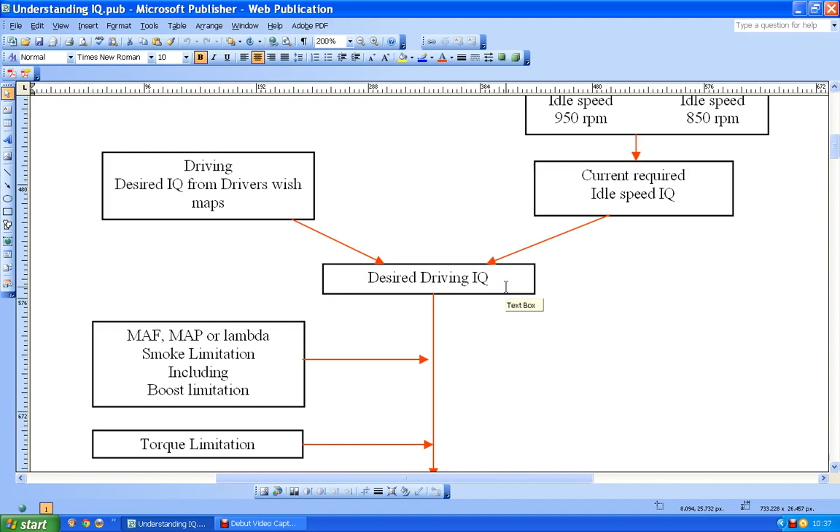Okay, this is the point at which I finished discussing in the last video, reaching the desired driving injection quantity, or IQ. And I won't go into how we got there because obviously I've just talked about that on the previous video. Having got that value, we can't just use that value, because if we did, we would have no way of knowing if there was the right amount of air to burn the fuel, and all sorts of other complicated bits and bobs to do with the ECU would just get totally confused.

So before this desired driving injection quantity can become a real desired driving injection quantity, if you've been looking at the maps, you obviously know it's got to go through a whole load of other maps to be tweaked and changed. There will be a MAF or a MAP or a lambda based smoke limitation of some description which will knock this driving desired IQ down to a smoke limited IQ. So in other words, limited by the amount of available air.

Now, people often don't take this into account when they're looking at this, but basically boost pressure and boost limitation are the same thing. They are really part of the smoke limitation, because if you get the boost mapping wrong, then the smoke limitation maps won't work properly anyway. So this really has to include the boost limitation and the boost maps as well. So you've got a whole chunk of information and maps all adjusting this desired driving IQ. So once we get to here, we've got our limited injection quantity.

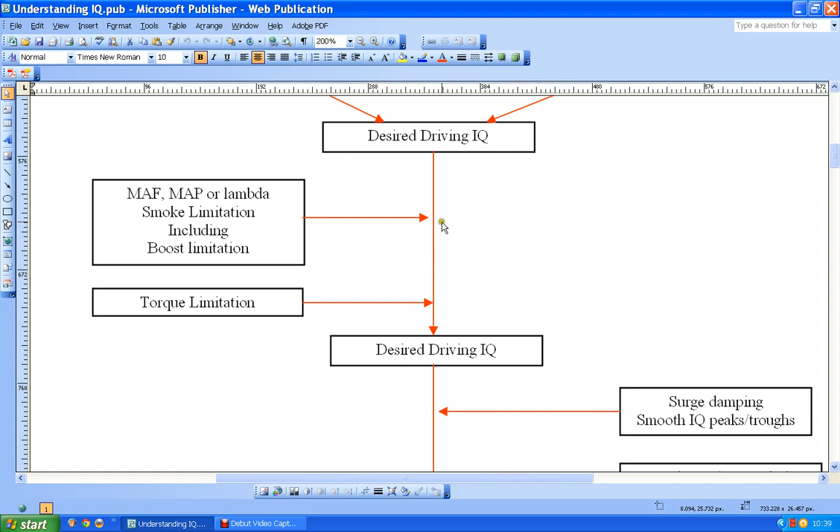Before we can get to our desired driving injection quantity, we've got to go through another limitation. The torque limiter will once again adjust whatever figure that this one is allowed to pass and adjust it down again. So we might have asked for 80 milligrams, let's say, of fuel here. This might well have knocked it down to 70 milligrams of fuel by making the decision that there's not enough air for 80. And when we get to here, the torque limiter might have knocked it down to 60 milligrams of fuel, working on the assumption that we were asking too much from the torque.

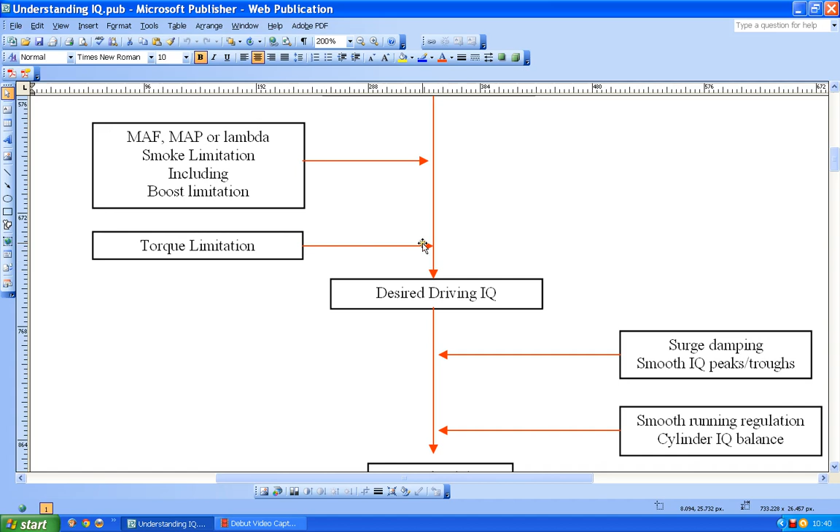In other words, what we were likely to get as a result of that was a less pleasant drive and possibly a damaged gearbox or a clutch. Now, that doesn't mean that that's what would happen, but it means that's what the designers of these files were thinking about, and obviously they want the car to last long enough for the customers to be happy. So now we've got our value after the torque limitation, so we've arrived at a final desired driving injection quantity.

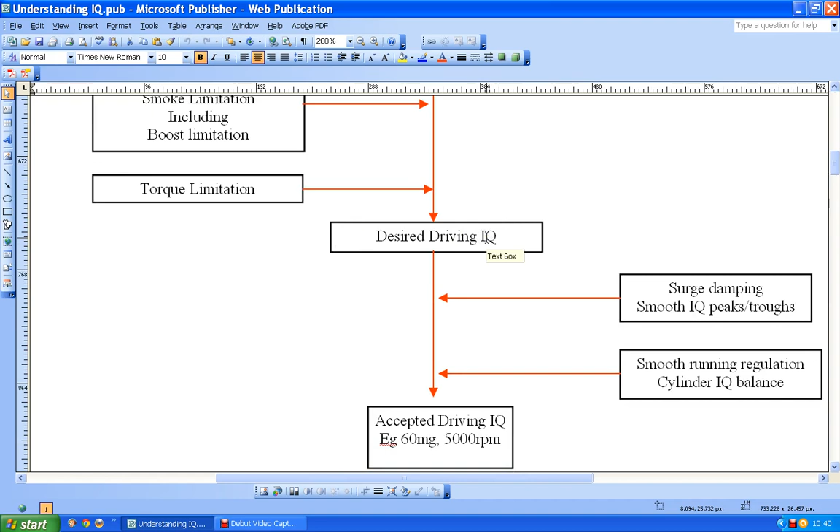So we've got a figure that we can use, and you'd think that that would be it, but it isn't it, because Bosch and VW look at this and they say to themselves, let's make this as nice an experience as possible, because while all these numbers are churning around inside the ECU, there is always the likelihood that, because we're dealing with a mechanical object, that this driving IQ will not be reflected as a beautifully smooth, perfect series of numbers, but it will vary slightly.

And in which case you might feel, when you're driving, a tendency for the engine to want to surge ahead or hold back, even though you've got the pedal held at one particular point. And so what they do is they build in maps which are for surge damping. In other words, that smooths out any peaks or troughs in the injection quantity. So the injection quantity might be wiggling up and down like this as you were driving along, but you won't notice, because the value that's actually getting past this point will either be perfectly smooth, or it will just have some nice smooth little wiggles in it that you're not going to notice.

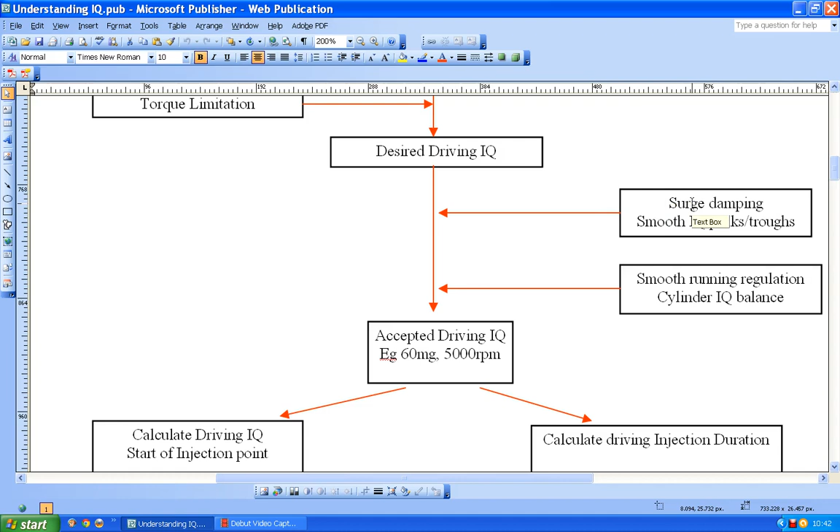So it improves the quality of the driving experience. You don't feel any sort of jerking or surging of the engine. Now, they could stop there, but the designers have gone one step further, especially with the PD injectors, because with PD injectors, they can measure when each injector fires, and so they can then measure how long the injector fires for, and as a result of that, they can get a pretty good idea of how much fuel went in exactly and how much force was put onto the piston to spin the engine round, because they can measure what the revs per minute are doing.

Now this means that if you've got a bit of a cylinder imbalance and one cylinder perhaps kicks a little bit harder or a little bit softer than the others, or maybe two of them kick reasonably okay but two are different to the other two, you might just feel that as a slightly lumpy tick over or a slightly less smooth journey when you're driving, especially with cruise control perhaps engaged.

And so what would happen at this point is these injection values for each individual cylinder are being balanced as close as possible so that each cylinder is producing the same engine revs per minute as if it was on its own. And if that is as close as possible to a match for all four cylinders, then the engine will run very, very smoothly. And so that's what they do there. They smooth out the running of the engine as best they can.

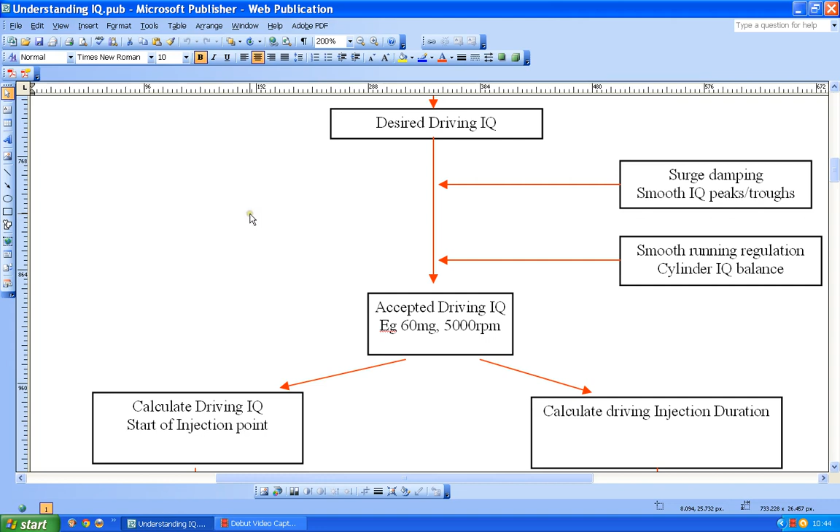Now, for a variety of reasons, if you're going to talk about this sort of thing, it's usually best to talk about maximum values, because they are some of the few values where you can pin them down and say, that's the value. It's quite difficult to pin down other values with engines, as designers will tell you. So the max values from wide open throttle on 60 milligrams and 5,000 revs per minute are probably the best place to start looking. So I'm going to use that as my fixed point to continue talking this through.

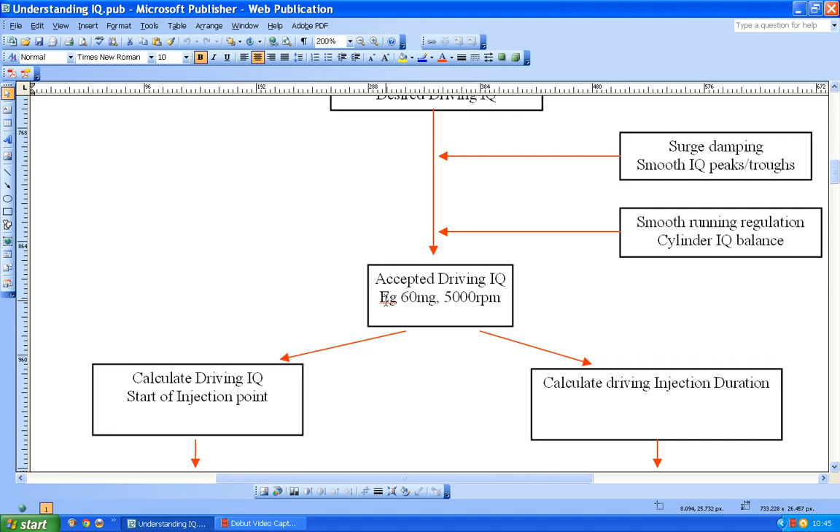And once again, I'm going to stop there because, like I said, I want to keep these videos at a sensible length so that people watching them don't tear their hair out listening to my voice.